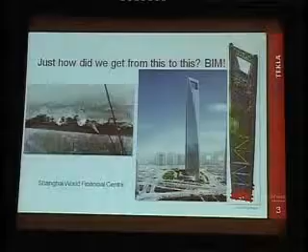So what's it all about? Really, it's a case of using BIM. How did we get from the old sleepy way of working to the modern projects? The building on the right is obviously the Shanghai World Financial Center, and again, we'll be looking at that in more detail.

Just a very quick overview of Tekla. People in the room may not have heard of Tekla. The Tekla Corporation, formed in 1966. We employ about 460 people worldwide. We have our own offices in 15 countries. Some countries we have more than one office. We have 30 resellers and partners around the world, and we have clients in 92 countries. We have offices right the way across, as I was saying, from the US right the way through to Japan.

A very quick overview of design information requirements and what engineers get involved with. Well, I assume most people in the room are engineers anyway, so you probably all know this information. But obviously engineers get involved in preparing schemes. It's really the transfer of information, the transfer of drawings, etc. They also look at the transfer of structural design intent, calculations on stability, fire engineering, really drawing specification quantities, explaining how the stability is going to be achieved in a building.

Engineers also look after change management. Is all the design information concurrent and coordinated? In other words, does the plan have the same information as elevations and sections? Again, they get involved with requests for further information and resolving this information requirement. They get involved with checking, but it's not only their own checking, it's the design team members' checking work. It may be an MEP engineer's information and clash checking between the different environments.

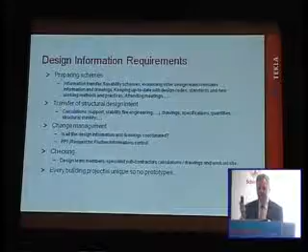It should also be remembered that every building is unique. There's no prototypes. It's not like a car, when you want to make a car, you make a prototype before you make thousands. Every building is normally unique. It's only built once. And using BIM technology, you're building the prototype in the memory of the computer for the very first time.

But the bottom line is all about money. Everybody needs to make money. So schemes need to be produced quicker, faster, cheaper. However, at the same time, producing better quality designs. So what does BIM give you? What does building information modeling give you? Well, it gives you control.

It may be worthwhile just referring to something that Simon very, very quickly touched upon. Within his presidential address, Norman Train, who's now the new president of the Institution of Structural Engineers, said that structures can be sophisticated, elegant and economic, but if it's late, ambiguous or difficult to construct, it will have failed. I just wonder how many buildings do actually fail because of that reason.

If we look at the information content where Tekla Structures can be used, it can be used all the way through the complete phase, from original linking to architectural sections, conceptual design, linking to A&D products, production of general arrangement drawings, multi-material detailing, production of drawings and reports, manufacturing information.

As Mark said, we can download to the steel machines, the CNC machines, to physically make the steelwork. Or for reinforced concrete, we can actually go to the bar bending machines that bend the reinforcement for delivery to site. We can go through erection schemes and then finally site arrangements and site handling itself.

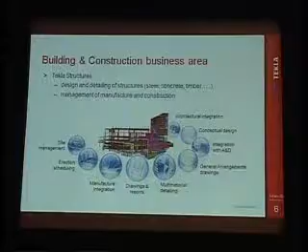If you look at the technology steps, obviously years ago, everything was drawn by hand. We've gone through the drawing by hand stage, and we went to the 2D stage where computers were actually used for production of information. But that really was just electronic drawing boards. Then, in the mid-80s, we went through the 3D side, the three-dimensional approach where you get X, Y, and vertical information and production of that information.

And we're now into a stage we call 4D, the fourth dimension being time. And this is all encapsulated in the BIM model itself.

Oh, I get a whistle somewhere.

Okay, as you can see, the various stages of the industry, we're saying that the steelwork industry has gone through the 3D into the 4D. Concrete design is just really going from the 2D side into the 3D environment.

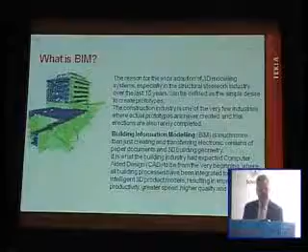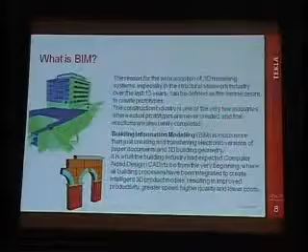So we said before, what is BIM? Well, in many ways, BIM can be explained as what CAD was originally intended to be. In other words, I have an object in my hand, and it's passing that object to the different systems. So whether it's a structural system or an architectural form, the boundary representation of that member, together with all the attributes, can be passed across. So that can be shared between different systems.

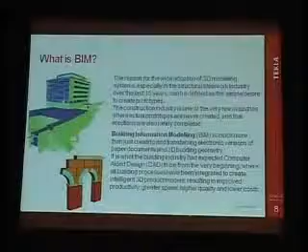Again, BIM can be explained in another way. In every project, an architect will produce a scheme, and he passes a certain amount of content across in the scheme by drawings, but he's worked on a whole wealth of information that's never passed on through the contract. Again, the structural engineer can produce more information by drawings, but he has a wealth of information in the background that's never really tapped upon.

Again, the contractors, whether it's a steelwork detailer or a concrete contractor, or even on site, a wealth of information is actually lost. If as-built drawings are produced, a bit more information can be passed across. But if people are using the common BIM information, everyone is building upon that information, and everyone has access to other people's information.

So what it really comes down to, instead of the old-fashioned 2D way of drawing where you have a line and you don't know if the information on that line is correct, you have the model. And the model of the structure is built for the very first time in the memory of the computer. So it's built before any materials are involved. So you can do your clash checking in that kind of environment when it's very cheap to change.

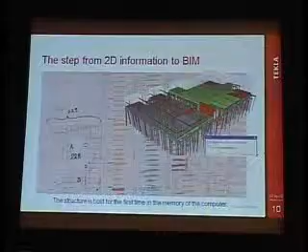Again, people talk about the structural BIM as against the architectural BIM, but there's a whole concept of BIM. We have the whole BIM of the building, which will include the architectural, the HVAC, electrical and plumbing information, but also the structural information. Tekla Structures just concentrates on the structural components. So there we are looking at the structural engineering, the steel detailing, the concrete detailing, the timber detailing, and all that's contained within one common Tekla model.

So, linking of best-of-breed applications. The engineer wants to start modelling the interfaces, so he needs to have access to the architectural model. He needs access to the MEP model, the mechanical, electrical, and plumbing or piping, depending on what you want to call it. But he needs to have this information.

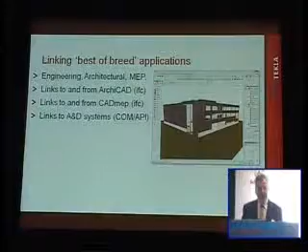And what we actually have here is an architectural model. This one's been produced in ArchiCAD, but it can be another of the applications. And the engineer can just import this into his model by using an IFC, an Industry Foundation Class. And again, we'll come on to cooperation and different types of environment and different standards. But it's a means of getting that information across.

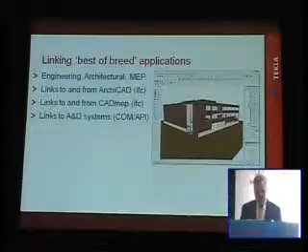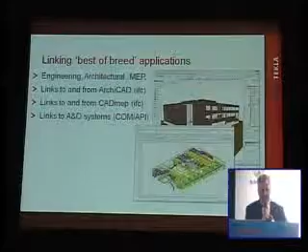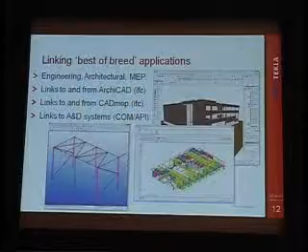Likewise, it could be an MEP model. And this model then can be passed across to the engineer or back to the architect. So everything can be clash checked in the different products. Again, it could be that the engineer wants to have links to his analysis and design systems, and this can be done in the same way. This is a model that's been produced in Tekla Structures, and the physical members have been changed to analytical members for passing across to the A&D products.

It really wants to be pointed out, the advantage here, that what we have is an MEP solution, normally done for plumbing and for ductwork, etc., and for mechanical parts. And the engineers working on the MEP scheme won't have the tools to create the structural model, so they're not modeling this kind of information.

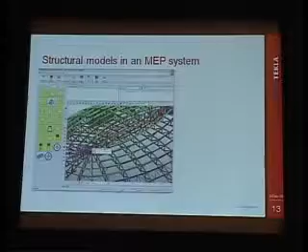And here, the stadium roof has actually come through from Tekla Structures. So you can import it into the MEP solution, so that you can do your clash checks on the structural side or the mechanical side.

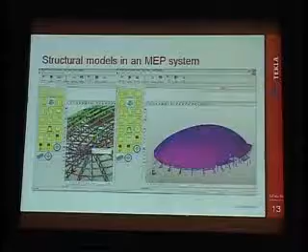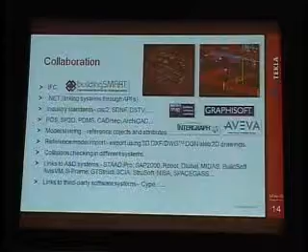Okay, we started talking about collaboration, and what I really wanted to do is to spend a few moments talking about how we can get information across. We started off with the IFC, which is the Industry Foundation Classes, which has been pushed by organisations like buildingSMART, used to be the old International Alliance for Interoperability, and it's a means of defining the boundary representation of these objects and passing it across.

The reason why IFCs are very strong, it's for all building objects. So whether it's an architectural object or a structural object, it can all be defined. Again, we have links through the .NET, and is anyone familiar with .NET programming?

No, okay. Microsoft have a Visual Studio, and within Visual Studio, it allows you to have 32 languages of choice, and you can pass this information across. So I can write something in C#, you can write something in Visual Basic, and it can transfer the information as an object.

We also support industry standards like CIS/2, the Steel Detailing Neutral Format, DSTV, and these allow us to talk to different products like Intergraph's PDS, Intergraph SmartPlant 3D, or AVEVA's PDMS. We can go to the CADmep system or through ArchiCAD, just using standard industry standards.

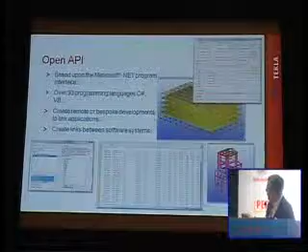And they can just fill in the information, as we see here, fill in the spans, change this information, and then just generate the whole structure. As well as going across to a proprietary system like that, you can also use Excel as a trigger. So you can use Excel by filling this information in, the size of the members, the grade, the start position, the end positions, and you press the button and a structure is produced. What .NET is allowing you to do is to define or tailor the system to make a bespoke solution for your own requirements.

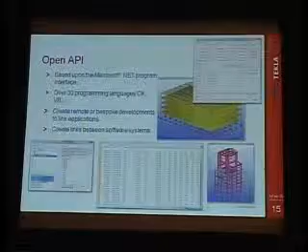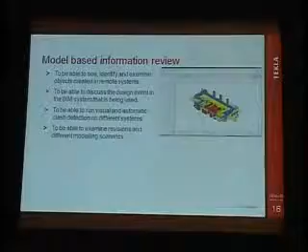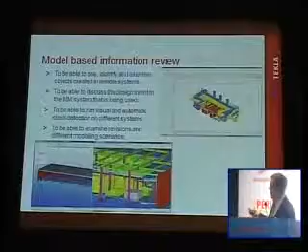Again, we may want to look at the information review, and this is really where we're taking across this BREP information. I've taken here an MEP solution, and what you can do is compare it with the structural solution. This structural solution has got all the openings and the perforations in the slab, etc., where these pieces of duct go through. And I can put the two models together and do the clash detection on the structural side or the mechanical side, and I can actually go into any of those objects, click on it and inquire on it. So if it's a pump, I can tell the manufacturer and where the information came from.

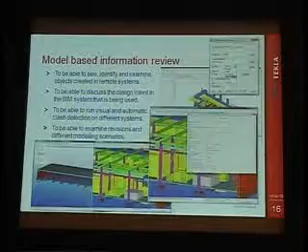But I can also compare the models. I can look at the new file, the existing file, the unchanged objects, changed objects, items that have been deleted and items that have been inserted. So I do have the whole control on the two interfaces.

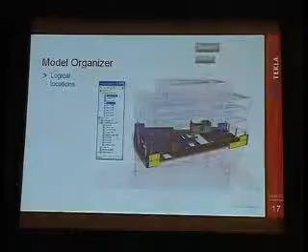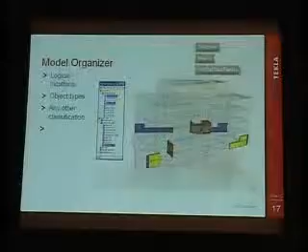Again, the control can be done through the model organizer, and in this case I can look at section A of a building, and I can zoom in on the second floor. And I may want to start looking at the various parts, the wall panels in this particular area. And I can zoom down to these areas or other classifications and put together other reference models. So you have these customizable panes of control of information.

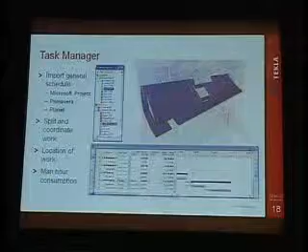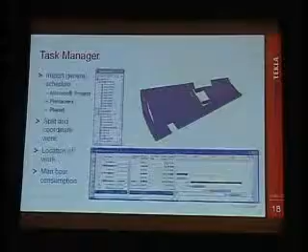Again, if we're looking through the 4D information, the fourth dimension being time, I can very quickly scroll through the second floor. I can then start looking at the different areas. In this case, I'm going to look at the hollow-core slabs, and I can just concentrate on that area. You can see I have a timeline here. I can fill that in with further and better information. Also, as before, I can export all this information to existing tools like Microsoft Project. So the whole control is actually through the Task Manager.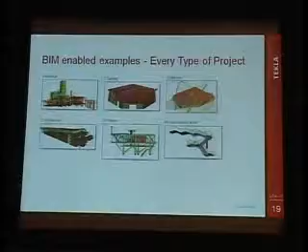People will ask what kind of projects can be done within Tekla Structures. It's industrial buildings, cladding, stadium work, commercial buildings, offshore buildings, miscellaneous steelwork, towers, metal framing, pre-engineered buildings, or bridges.

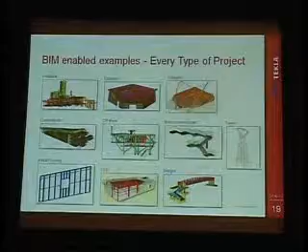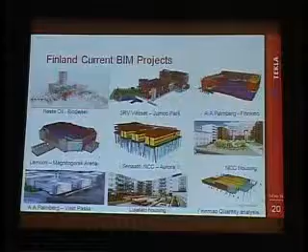That's mainly on the steelwork side, but we can look at the concrete side too, and we have a wealth of information. These examples are projects ongoing at the moment in Finland. If we look at the Neste Oil biodiesel plant, one of the case studies, it's not a tall building, but it shows you what you can do with the system. This biodiesel refinery is actually in a place called Porvoo over in Finland.

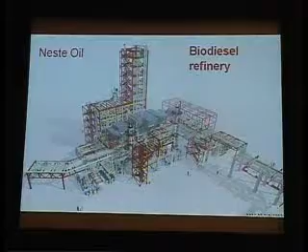If I show the model and some photographs from site, the building covers about 13,000 square metres. There's about 19,000 cubic metres of concrete and 5,000 tonnes of steelwork, and approximately 200 kilometres of pipework just in the main stories, or the main plant itself.

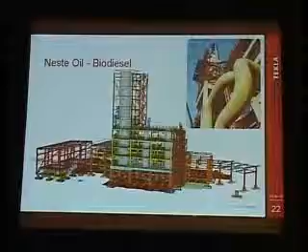Again, it's not only plant structures or tall buildings. This is an example of the Swansea Sail Bridge in the UK, which won a design award a few years ago. The whole structure is modelled, and the drawings can be produced automatically or semi-automatically. If you change something in the model, all your information, reports, and drawings are automatically updated.

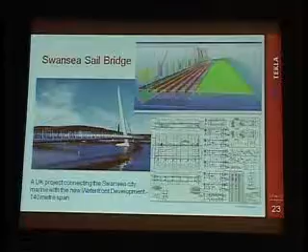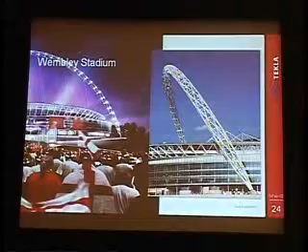If we start going more into the urban habitat and looking at stadium-type projects, this project is Wembley Stadium, which football supporters in the room may recognise. The main stadium itself has various views shown there.

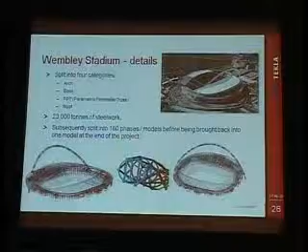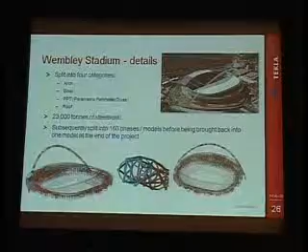It was really defined into 4 stages: the arch, the bowl, the parametric perimeter truss, and the main roof itself. There was about 23,000 tonnes of steelwork in the job. It was subdivided into 160 phases, and at the end of the project was brought back into one master model. Looking at the scheme, there's about 2,500 intersection points.

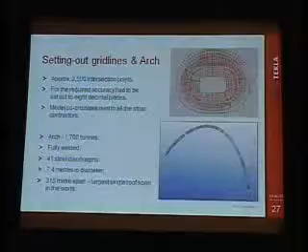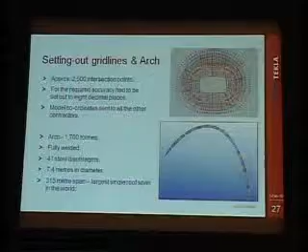Each intersection point was actually modelled down to 8 decimal places of a millimetre, so you're dealing to 0.000001 of a millimetre. You can see it's more like mechanical tolerance than normal structural tolerance, but they need that kind of accuracy because of the scale of the structure itself.

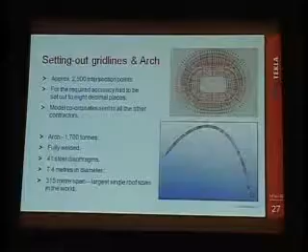In the arch, there's about 1,700 tonnes of steelwork. The diameter of the arch is actually 7.4 metres, and at 315 metres span, it's the largest single span roof member in the world.

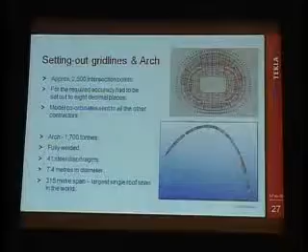The bowl is about 15,000 tonnes of steelwork. There's 90,000 seats in the structure, and there's no vertical supports above the terracing, which means every spectator has a complete uninterrupted view of the pitch itself.

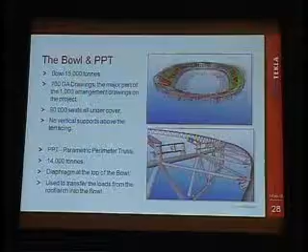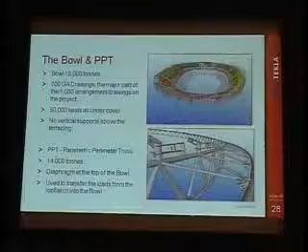The parametric perimeter truss was about 14,000 tonnes of steelwork, used to transmit the loads from the roof and from the arch into the main bowl itself. The roof is about 4,500 tonnes. It may be worthwhile saying there's actually a sliding roof on this area, and it's erected on 6,000 tonnes of temporary steelwork to erect the main roof itself.

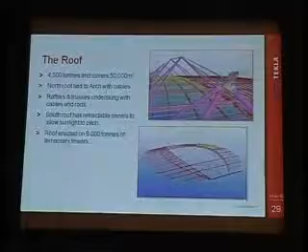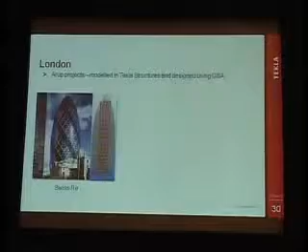It may be worthwhile showing some projects on the London landscape. You can see the Swiss Re building, 30 St Mary Axe, and the structure behind the building itself. A couple of projects going on at the moment include the Heron Tower that just started, together with the Leadenhall project.

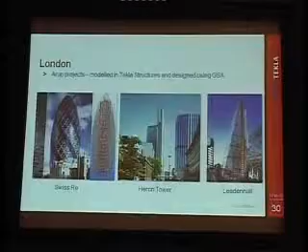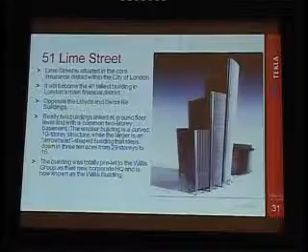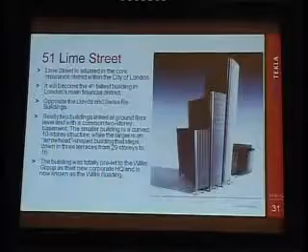Again, all modelled by Arup and passed on to the steelwork contractor in this case. A building to look at more closely is 51 Lime Street, now known as the Willis Building. It's the fourth tallest building in London's financial district, only 29 stories at the back, tapering down to a 16-storey block at the front, with a 10-storey block linked together by two basement buildings. Quite a complicated structure, as you can see from the various elevations.

A bit more interest on the building: the model itself was created by Whitby Bird and passed on to William Hare, who are known quite well in India as well, a global steelwork contractor. The architect, Foster's, and the construction manager, Mace, realised that the only way to get true information from the model was to actually use the model itself, and that's what they were doing at the end of the project.

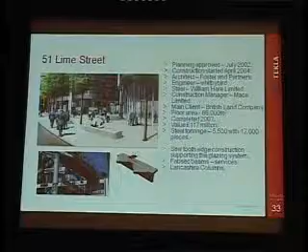A couple of areas to look at: they had what they called the sawtooth construction. If you imagine all these members are all curved, you can see where the glazing mullions go onto the side of the building, supported by these permanent soffits. Obviously the geometry is very, very complicated, and this is the kind of information they needed to get from the model itself.

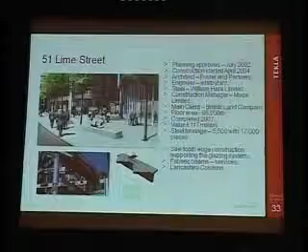They also had what was called the Lancaster columns. This is a double two-storey height column, again for fire engineering, consisting of 140mm plates, 100mm webs, toe plates, all in a steel tube, all filled with concrete to react to any kind of fire loading.

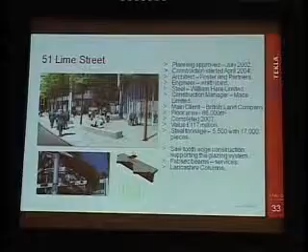And that is the final structural scheme. Again, you can see the complexity of the structure itself. Every spare square metre on the project was actually utilised.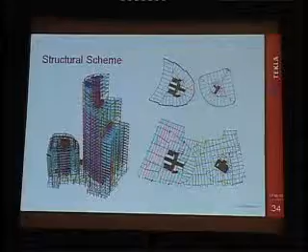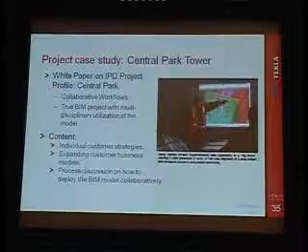We can also see another quick case study, a building over in Broomfield, Colorado. It's really a case study that can be downloaded from the various websites. It's only an 11-storey building with one basement area, but the case study was actually used to produce the way of working and really cost savings on the project. And that's the case study or the white paper itself.

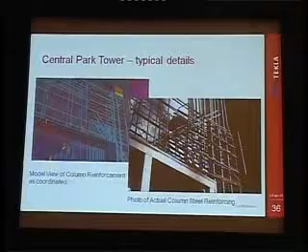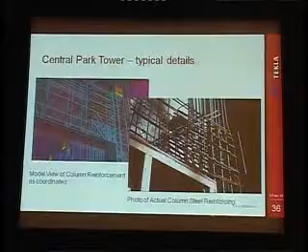As I was saying before, the steelwork and the reinforcement can be positioned. Here we have all the reinforcement on the job in one particular area, and you can see the actual work on site. So the model is no different from the actual work on site, and that's how the whole thing is coordinated. Again, BIM was actually used in all the site meetings, and you see here one of the discussions going on about how the information can be used in placements.

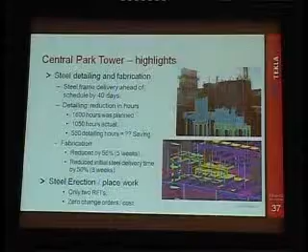What we actually have is, if you look at the steel frame, it was actually delivered 40 days ahead of schedule. There was actually 550 detailing hours saved on the project from the original estimate. The fabrication period was reduced by 5 weeks, and only 2 requests for further information were required on the whole of the project. On the concrete side, there were 0 RFIs.

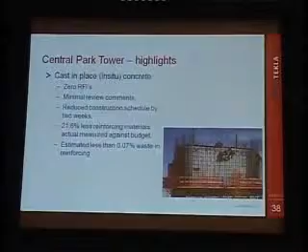They reckon that the schedule on the concrete placement was reduced by 2 weeks, and there was a 21.6% reduction in reinforcement because they knew where every bar was going to be placed.

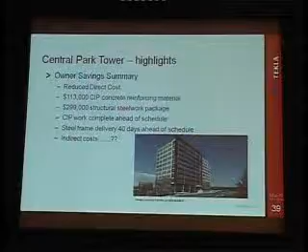So as a quick overview, the total cost savings on the whole of the project: on the steelwork, they saved $299,000. On the concrete, they reckon they saved $113,000. That doesn't include the indirect costs for completing the work early.

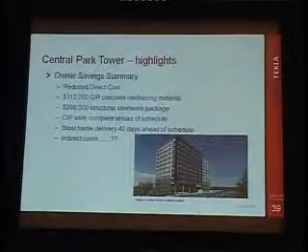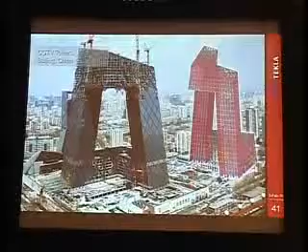Again, another building that's actually used around the world now by Chinese television, by CCTV. This was again used by the TV for broadcasting the live pictures around the world. And you can see the CCTV tower.

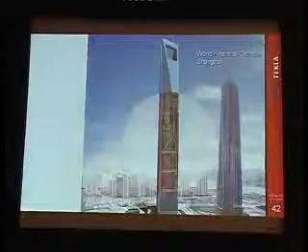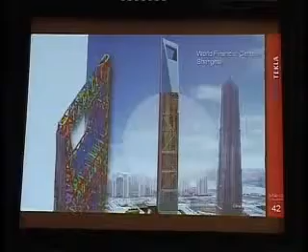If we come back to our original case study, again produced by another one of our users, the Shanghai World Financial Center. I realise that Mark's going to ring the bell any minute now, so I'll be very, very quick. There's a very quick overview of the structure.

Again, it's on most of the boards outside. It's also in the top 4 buildings, depending on different classifications. The building itself was actually a $1.1 billion project, and the building is actually 492 metres high. It's restricted by that height due to planning requirements. Originally, it was planned to be over 500 metres, but the local authority permit wouldn't allow them to go any further. But there are 3 basement levels, 101 floors. It's mixed usage, and there are 30 escalators and lifts in the building itself.

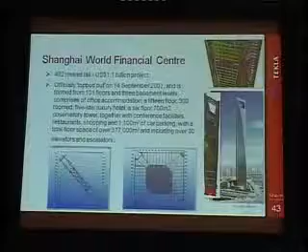So in conclusion, what is BIM? Well, BIM is more of an activity than just one particular process. It's a means of allowing all the project design team members to collaborate all the information and also to clash check other people's work. BIM is probably well known in the AEC, the Architectural Engineering and Construction market, but the same process is known as interoperability in the plant market, the EPC market.

So using industry standards and open APIs allows the objects to be transferred from system to system, so things only need to be modelled once. The BIM concept can be used from the conceptual stage right the way through design, detail, procurement and manufacture. Projects can be totally designed, measured, coordinated and controlled before works even start on site. Site coordination is always required, and this can also be controlled through the BIM model itself.